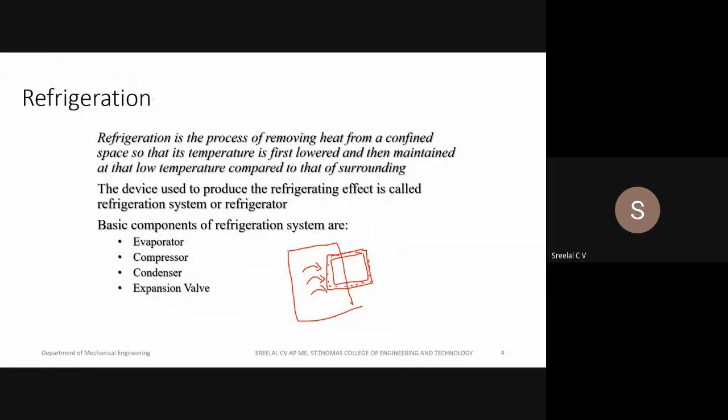So the refrigeration, refrigerator and the refrigerant. Refrigerant is nothing but the working fluid used. So in the old days the air is used as the refrigerant, mainly due to the availability of the air, or we can say it is free of cost.

But the absorbing capacity of the air is very very low at that time.

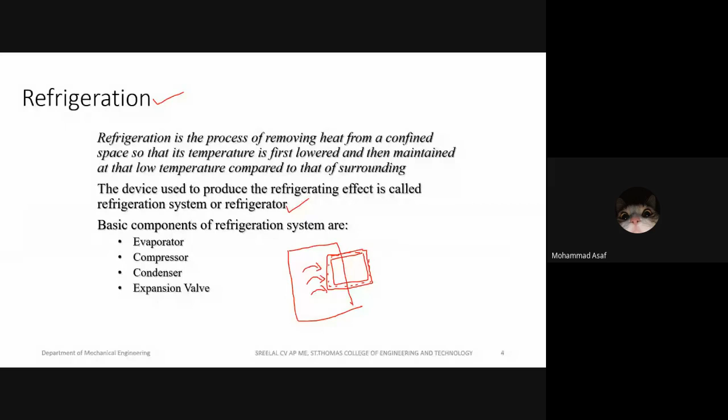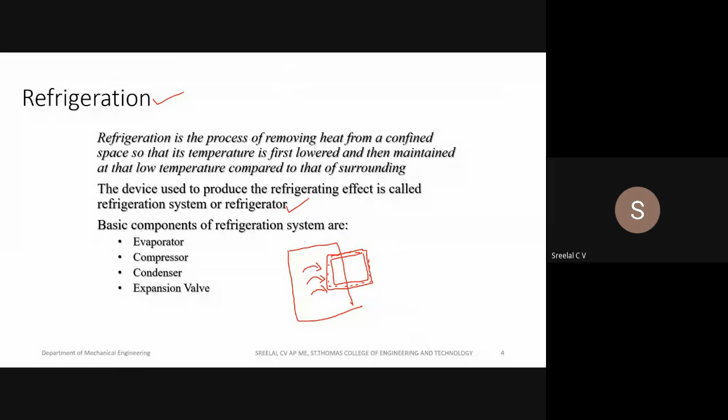Okay, so the main components of this particular refrigeration system are evaporator, compressor, condenser and expansion valve. So we will be discussing many refrigeration systems, based on the working fluid and the operations, we will be studying so many refrigeration systems. So the applications of refrigeration system, we already know.

Long preservation of food items without spoiling, preserved transportation of food products. Fish and everything, like from Kozhikode to Mangalore, so many vehicles will be moving with this particular refrigeration system installed in the vehicle itself. Preserving life-saving drugs, vaccination, medical and surgical aid in the operation theatre, and making ice, dry ice, cryogenic fluid, etc.

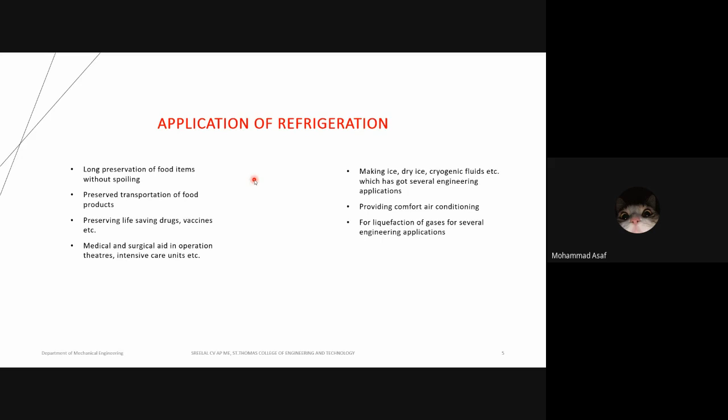So the cryogenic fluids, like cryogenic fuels. What is meant by cryogenic? എന്താണ് cryogenic എന്ന് പറഞ്ഞാൽ? Nowadays we are very familiar with this term cryogenic. What is meant by that? Cryogenic engine. അറിയില്ല. Okay, fine.

Okay. Then just have a Google search over that particular word, cryogenic fluid or cryogenic engines. Just take a Google search and you will be getting it. And the next class you can tell me that.

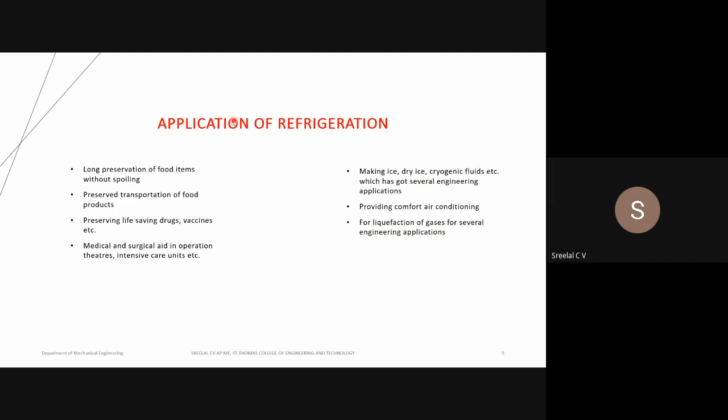As an engineer, and as a mechanical engineer, it is very important. Then providing comfort, air conditioning, and liquefaction of gas for several engineering applications. So these are the main applications of the refrigeration system. So next we are going to discuss about the unit of refrigeration.

This unit is known as the ton of refrigeration, which is denoted by TR. It will give you an idea about the capacity of the refrigeration unit, how it will be absorbing heat. We define 1 ton of refrigeration as the amount of heat to be removed from 1000 kg of water at 0 degrees Celsius to convert it into ice at 0 degrees Celsius in 24 hours.

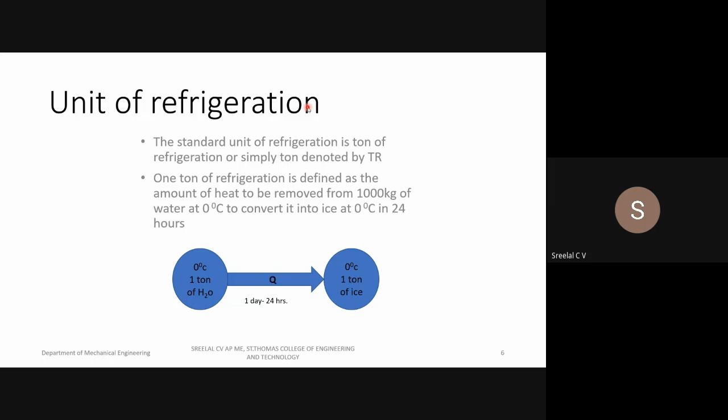Sir. Okay, 1 ton of H2O, the amount of heat in order to convert it to 1 ton of ice in 24 hours. So this is the unit of refrigeration. And in actual practice, 1 ton of refrigeration is taken as 210 kilojoule per minute, or 3.5 kilowatt. The decimal looks like a dash.

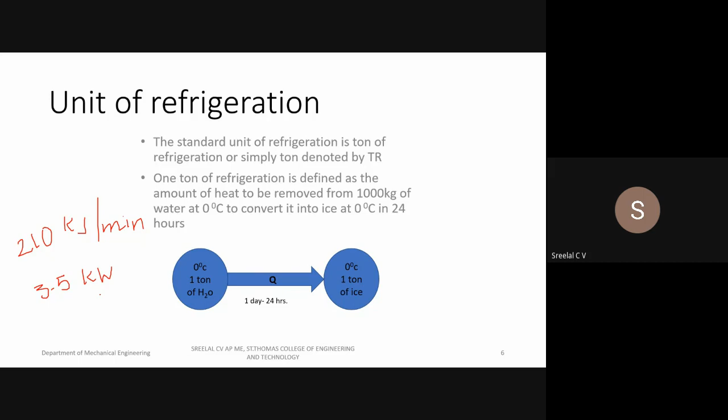So in actual practice, 1 ton of refrigeration is taken as 210 kilojoule per minute as well as 3.5 kilowatt. So next we are going to discuss about the coefficient of performance.

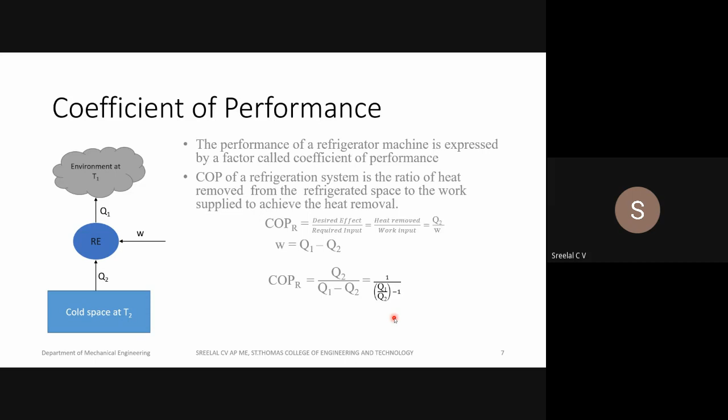I think the time is up, right? Yes, sir. If I ask you, you'll just say yes. Last one day it was like that.

So next class we will be discussing the vapor compression refrigeration system, with the TS and pH diagram, and there will be many problems corresponding to it.

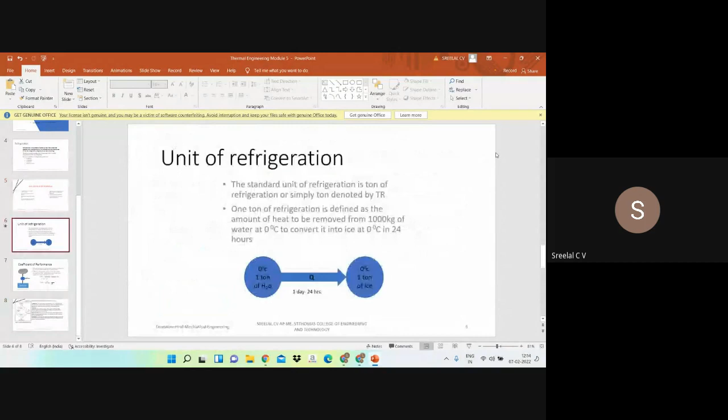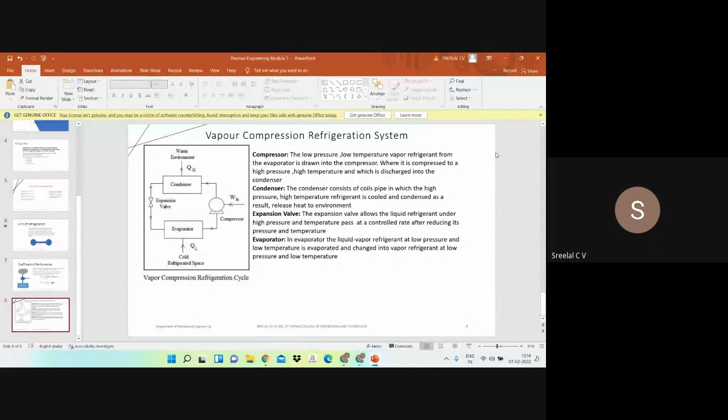As well as just have a small idea about the vapor compression refrigeration system. Okay, sir. Just 1 minute. Sir, important questions for me.